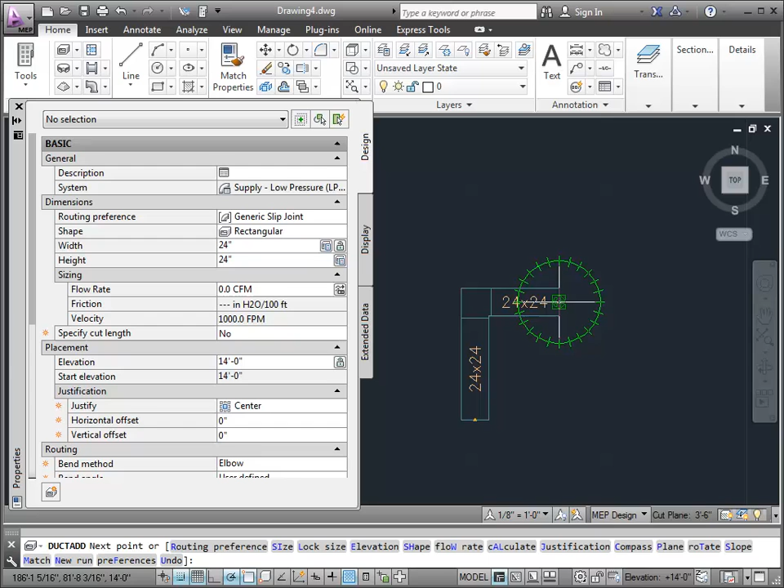At some point, I'm going to decide, well, I want a T here. There's a couple things we could do. We could click on this plus sign and just start drawing, and you get a T, okay?

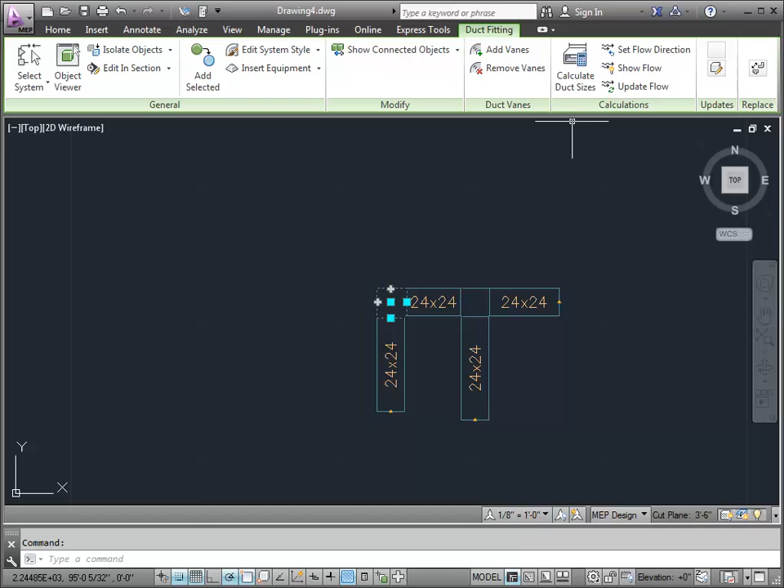Well, there's another thing that you can do now. If you select on your fitting, you can come up here and there's this new button here on the ribbon called the one-click fitting replace.

We start on it and it says select the component you want to use, elbow or T. So you can come here and say T now. Fitting replace, accept, next, and just follow the command line and it swaps it out with something else.

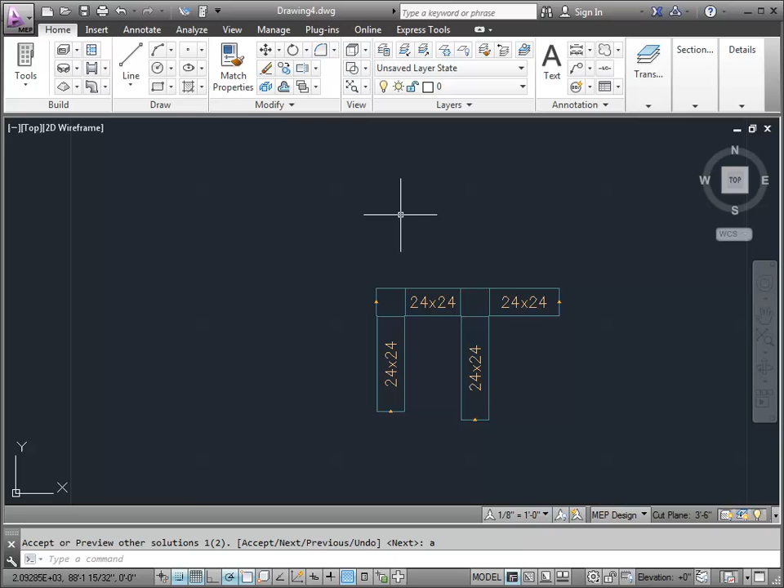So we'll zoom in on that. You can see we now have a T there instead of an elbow. That's pretty much the new feature.

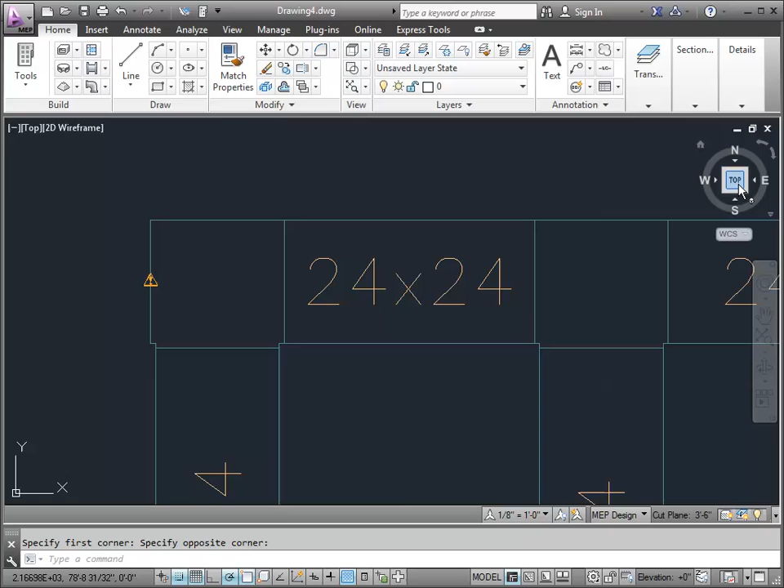Actually, let me change my mind - that's not pretty much the new feature. I know with ductwork, you're pretty much limited with rectangular shapes, T's, elbows. With piping though, it gets a lot more complicated, and that's where the feature probably shines a bit more. So let's go and switch to piping.

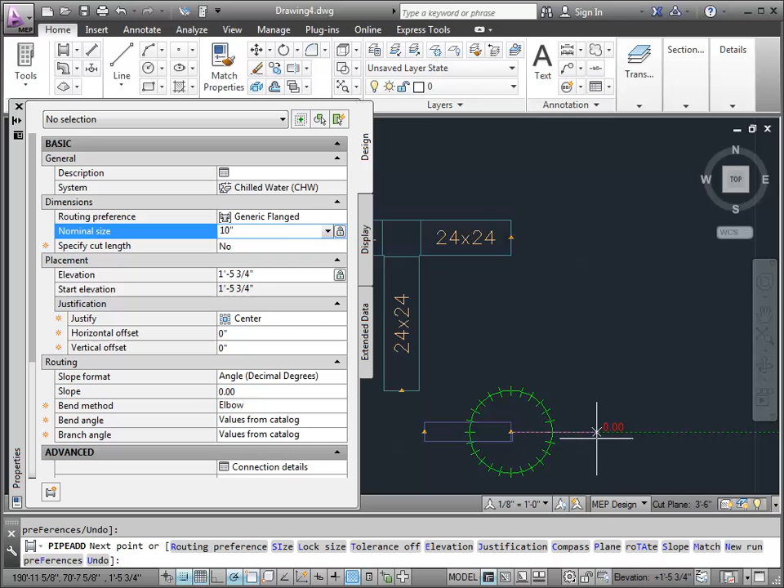And let's draw in some pipe.

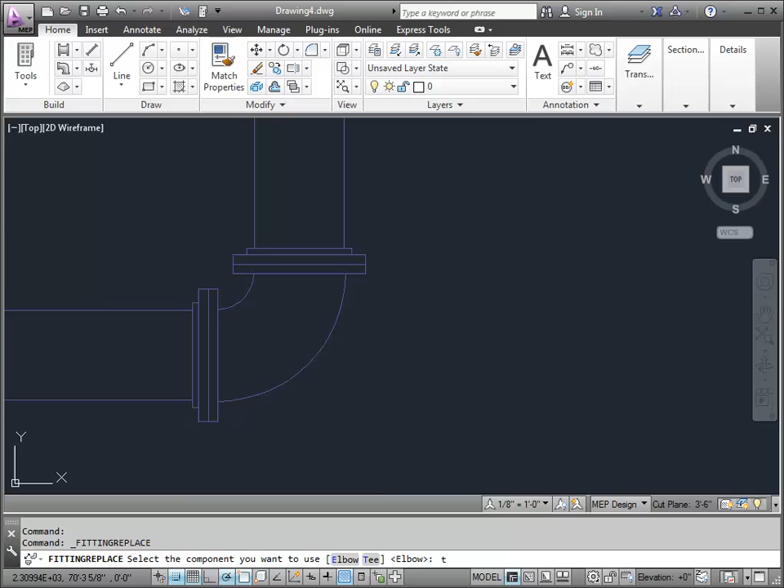So here you can now choose different kinds of fittings and so on, and you hit enter. Now notice what it does is it shows you kind of the old location of the fitting and the T and how the new one is going to come in there. It gives you kind of a preview, and it rebuilds the whole model for you, which is kind of neat.

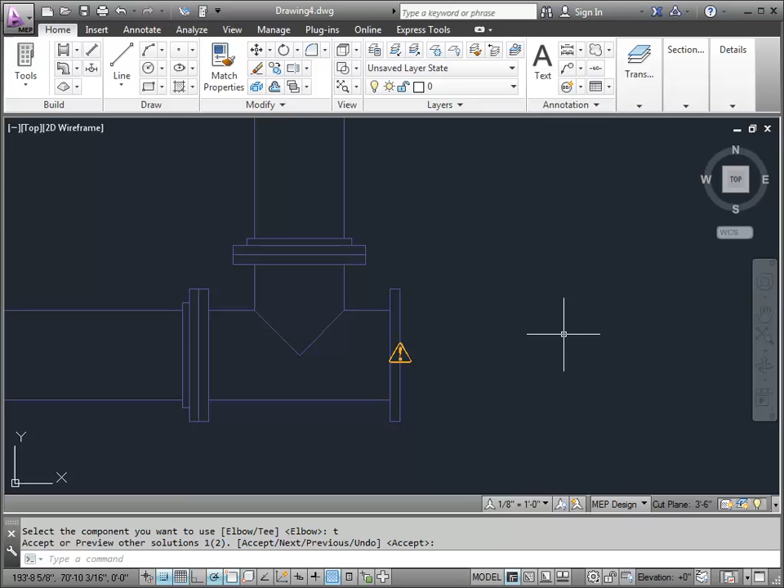But there's a lot more to swapping in and out pipe fittings than really for duct fittings. Duct fittings are fabricated. Pipe fittings are just much more complicated, especially with flanged and all the different types of connection types that you have. What type of T is this? Are any of these legs longer than the other legs? All sorts of different things like that.

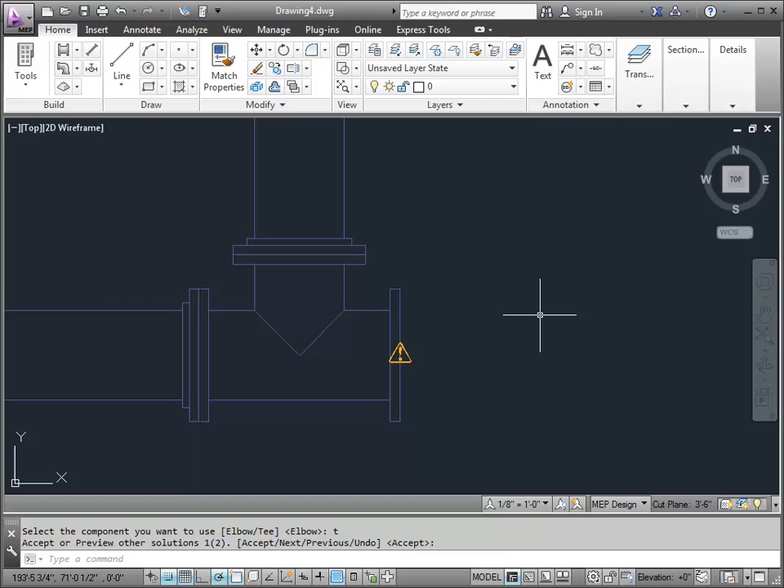But it's a pretty powerful little routine. So give it a shot. I think you'll like it. Thank you much.